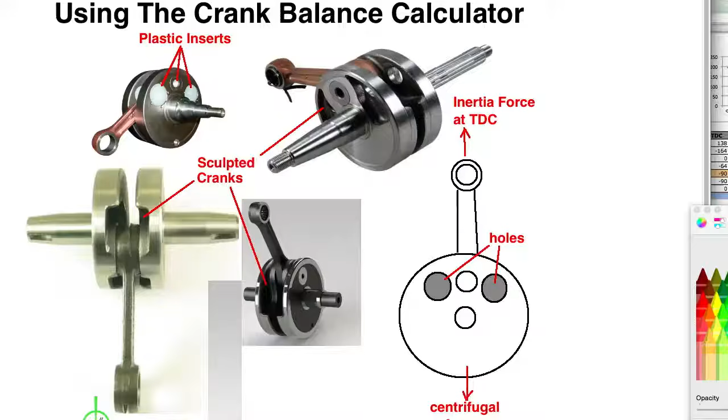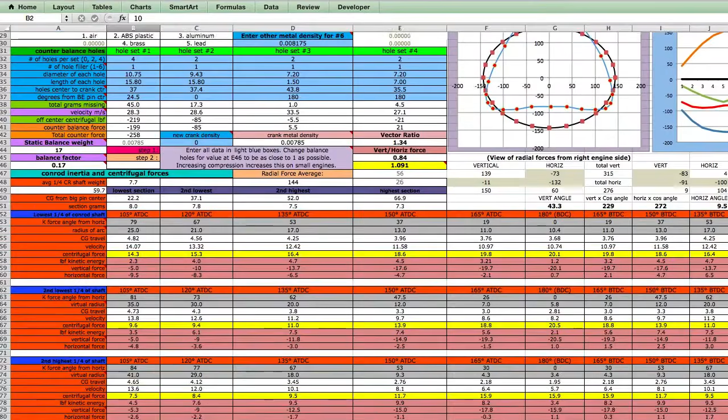This video is about my Excel spreadsheet for balancing a single cylinder crank. This is the spreadsheet, and what it does is graph the combination of inertia and centrifugal forces every 15 degrees of crank movement. And this is the graph right here in this case. This is a reference graph right here. If from zero, each of these forces, outward forces, are equal all the way around 360 degrees.

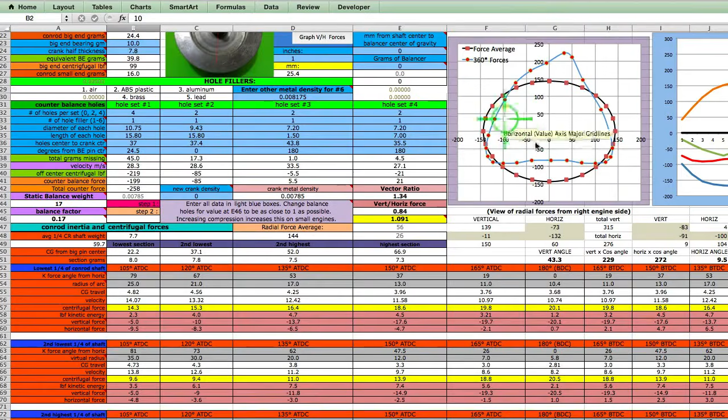This is no simple calculator. It takes all the forces. Let me read some of them to you. Kinetic force angle from horizontal, radius of arc, velocity, centrifugal force, pound-force of kinetic energy, vertical force, and horizontal force. All of those are totaled together for every 15 degrees.

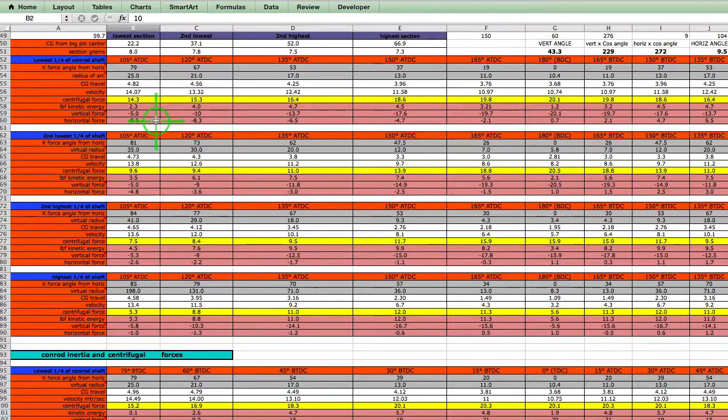And that has to be done because of this. It's called a connecting rod. If this right here was of some super metal that weighed nothing, there might be a simple formula to do a crank balance. But from here all the way to the other end, it has an odd movement because this is fully vertical and just vertical, and this end right here is completely circular. But you have a combination of the two right here, and that makes it more complex.

Probably the strongest inertial force you have is when the piston reaches top dead center and it's changing direction. So you have an inertial force that's upward, which is countered by the downward centrifugal force of the crank due to the two or more holes on this side right here.

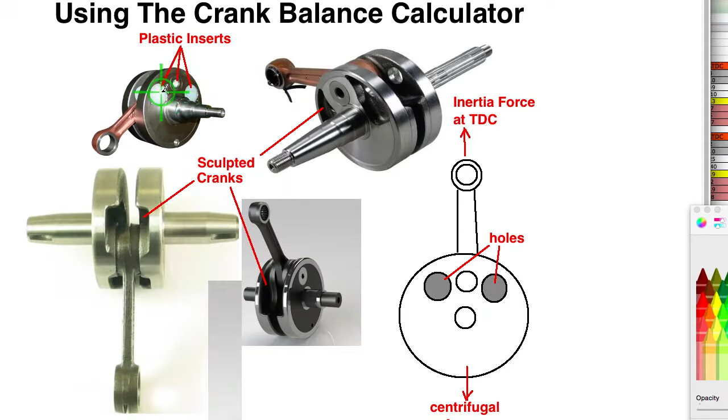My calculator can also compensate for sculpted out areas in cranks and allow different substances to be the filler for holes. This right here is the YouTube video of mine that shows you how to enter in a virtual set of holes to compensate for these sculpted out areas.

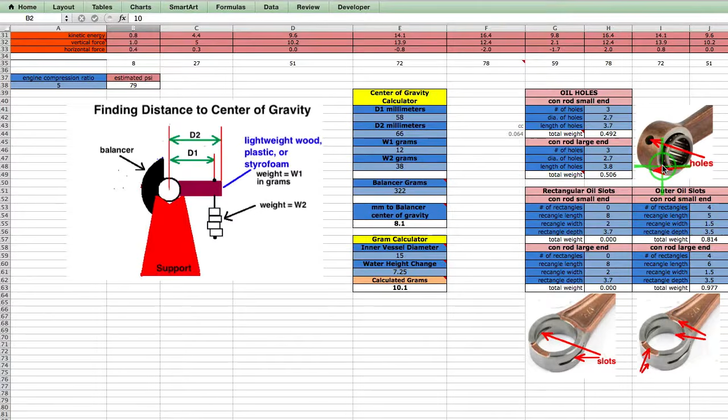This right here is to help you get the right calculated weight for the balance shaft on engines that do have that, which would be the big bore usually. This right here is about adding in the weight loss for holes and slots drilled in the connecting rod.

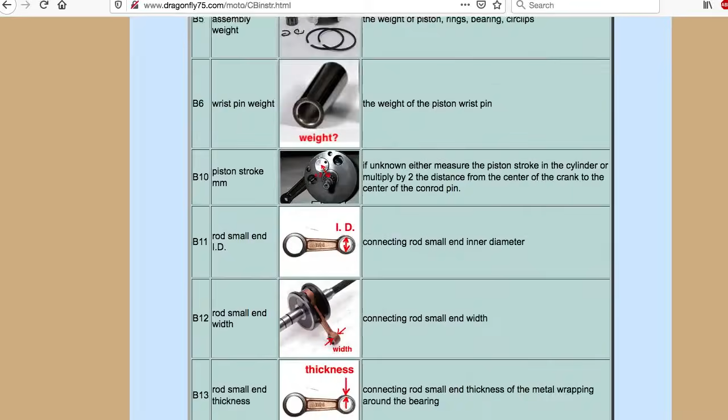This right here is the page that gives the instructions on how to use it, which is detailed. Actually, this is the intro page to the instructions. This is the instruction page. This right here tells each measurement that you make, whether or not it's a measurement or figuring out the weight. And you do have to have a little digital scale to weigh these things on to get the grams for each one.

A calculator like this is essential because of the connecting rod. You can't use the balance factor because it really is not a method to determine what the balance hole change should be. It's really just a method of conveying to someone else with the same crank what you did to yours. It's not a method for figuring out what you need to do. So you enter in all the details that are described on the instructions page.

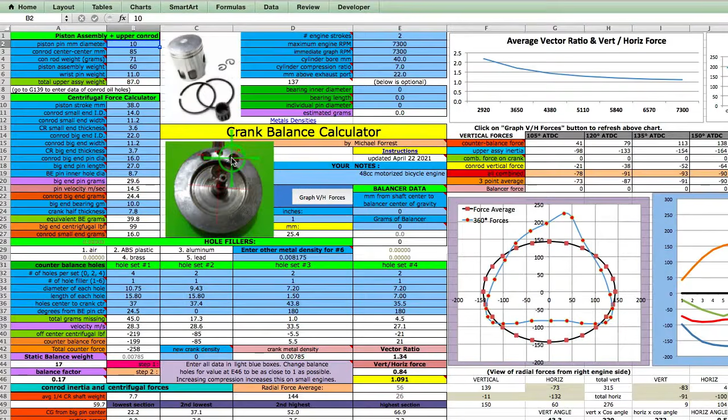And these columns right here are for the hole sets. For instance, these two are the same distance away from this center line. So even though there's 4 of them, they're considered one set. So you have 4 right here. And the filler is air. So number 1 is air. Number 2 is plastic. 3 is aluminum. 4 is brass. 5 is lead. And if you have some other substance, you can enter the density right here.

So then you get the diameter, the length of each hole, the distance from the center of the hole to the center of the crank, and the degrees from this center line right here, from the crank center to the conrod pin center. So these are 24.5 degrees off, which goes right here. If you do holes on the opposite side, it's 180 degrees like what you have right here.

For each of these RPM going up to the maximum that you state right here, the calculator will graph this and then boil it down to a single balance number right here, and then that number will be graphed right here. And the idea being that the most perfect balance will be right at 1 at top RPM. This is my ride, and it's a small engine, so the smaller the engines, the farther off you can be. This is 9% off, and I can't feel any vibration on it.